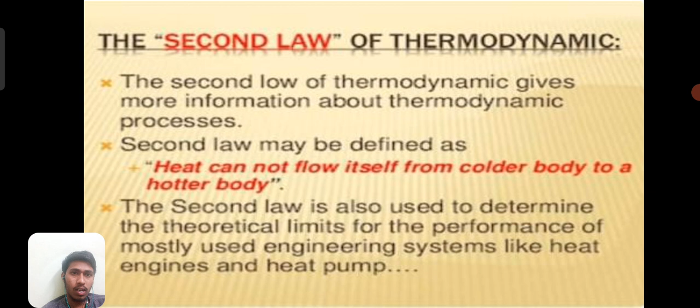and Carnot's principle, which is related to engineering thermodynamics, specifically the second law of thermodynamics. The second law gives more information about thermodynamic processes. It may be defined as: heat cannot flow by itself from a colder body to a hotter body. The second law is also used to determine theoretical limits for the performance of commonly used engineering systems like heat engines and heat pumps.

The Kelvin-Planck statement of the second law of thermodynamics states that it is impossible for any device, such as a heat engine operating on a cycle, to receive heat from a single reservoir and produce a net amount of work.

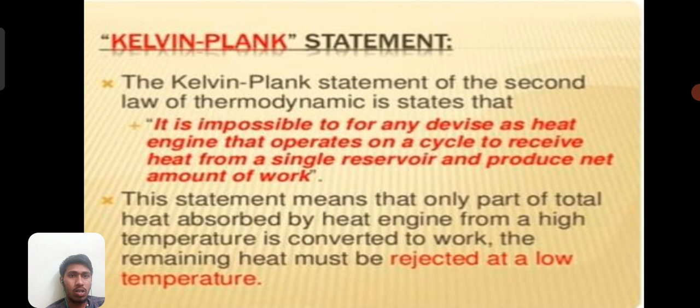This means that only part of the total heat absorbed by the heat engine from the high temperature source is converted into work; the remaining heat must be rejected to a low temperature. The Kelvin-Planck statement implies that high temperature heat is partly converted into work, and the remainder is rejected to a low temperature sink.

The heat engine shown in figure 1 converts 100% of heat into 100% of work, where the initial and final results are the same. This system does not satisfy the second law, so the statement can also be expressed as: no heat engine has 100% thermal efficiency.

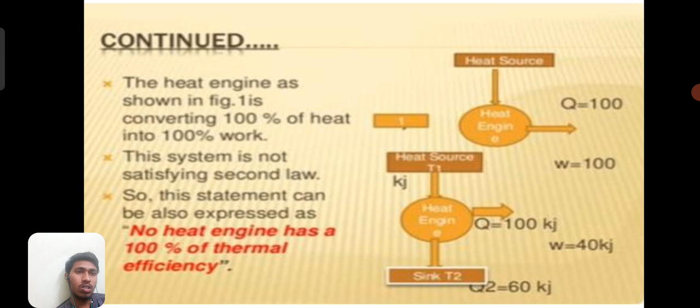As shown in the following diagram: heat engine Q equals 100, with a heat source and a sink, where the heat source is known as T1 and the sink as T2. Q equals 100 kilojoules, work equals 40 kilojoules, and the rejected heat is 60 kilojoules.

This is known as the Clausius statement of the second law of thermodynamics: it is impossible to construct a device, such as a heat pump, that operates in a cycle and produces no effect other than the transfer of heat from a lower temperature to a higher temperature body.

This statement means that heat cannot flow from colder bodies to hotter bodies without work input. The Clausius statement says it is impossible to construct a device, such as a heat pump, operating in a cycle that produces no effect other than the transfer of heat from low temperature to high temperature, meaning heat cannot flow from colder to hotter bodies without any work.

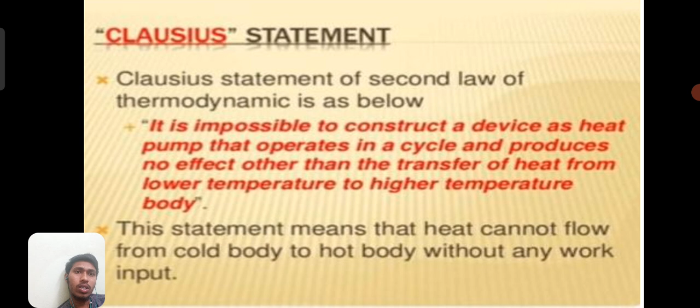We can observe a flowchart diagram where the heat source is T1 and the heat sink is T2, representing a heat pump. Here Q1 equals 100 kilojoules, no external work is supplied, and Q2 equals 100 kilojoules.

In the second diagram, we observe that work is done from T2 to T1, where T2 is the sink and T1 is the heat source. Q1 equals 100 kilojoules, Q2 equals 60 kilojoules, and external work is supplied, giving a final work result of 40 kilojoules.

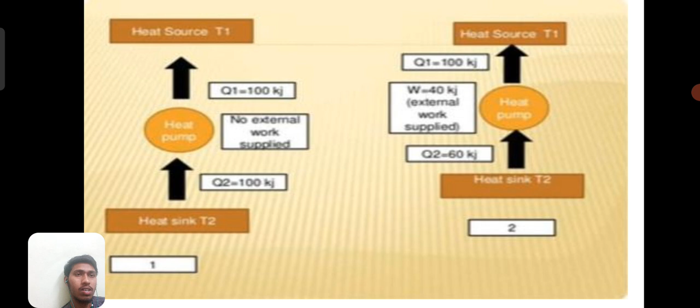Comparing the Clausius statement and the Kelvin-Planck statement: the Kelvin-Planck statement is applicable to heat engines, while the Clausius statement is applicable to heat pumps and refrigerators.

Both are negative statements, based on experimental observations with no mathematical proof.

These are the comparisons made between the Kelvin-Planck statement and the Clausius statement.

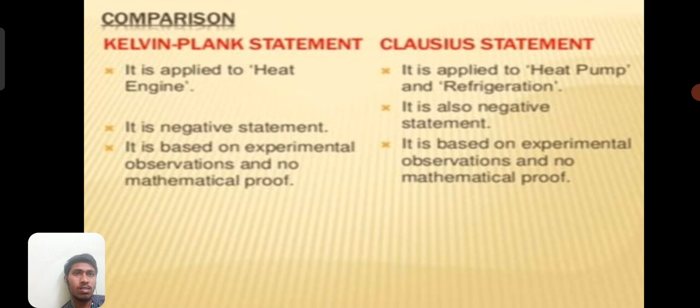Our topic is perpetual motion of a machine second kind, known as PMM2. If the engine exchanges heat with a single thermal reservoir in which heat supplied is completely converted into an equivalent amount of work, its efficiency becomes 100%. This kind of machine is known as PMM2, generally called perpetual motion of a machine.

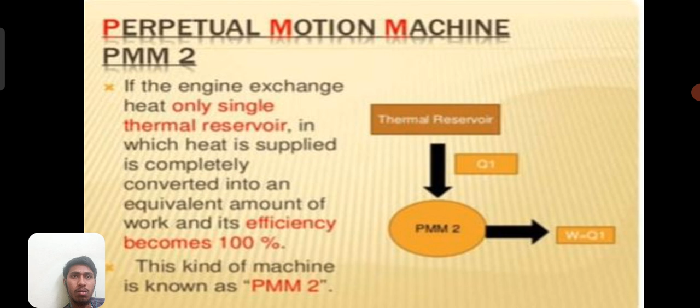If the heat engine exchanges heat with only a single thermal reservoir in which heat supplied is completely converted into an equivalent amount of work, heat is completely converted into work and efficiency becomes 100%. This kind of machine is known as PMM2, and PMM2 violates the second law of thermodynamics and is practically impossible to construct. The efficiency of PMM2 is work equals heat, and efficiency is 100%.

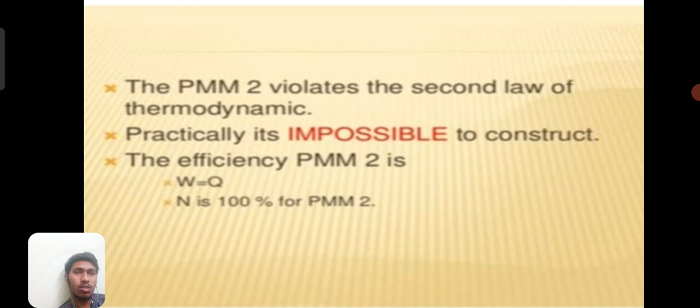Reversible process and irreversible process: a reversible process is one that can be executed in reverse direction with no net change in the system or surroundings. At the end of the forward and backward reversible process, both system and surroundings return to their initial and prior states. No real processes are reversible; however, reversible processes are theoretically the most efficient. All real processes are irreversible due to irreversibility. Hence, real processes are less efficient than reversible processes.

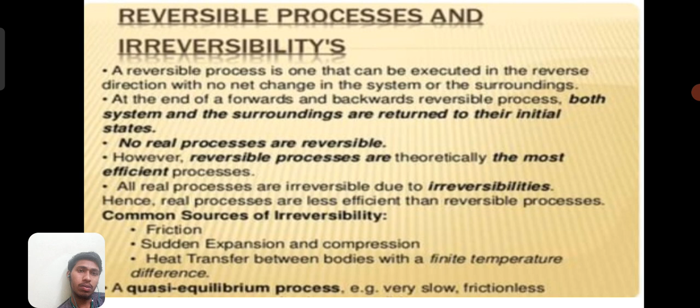Common sources of irreversibility are friction, sudden expansion and compression, and heat transfer between bodies with a finite temperature difference. A quasi-equilibrium process is very slow and frictionless. Now let's discuss the Carnot cycle and Carnot heat engine.

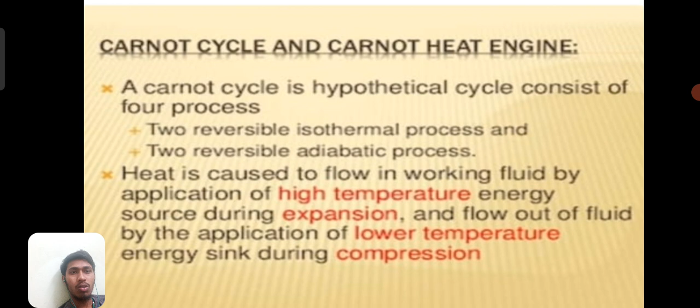Heat is caused to flow into the working fluid by application of a high temperature energy source during expansion, and flows out of the fluid by application of a low temperature energy sink during compression.

The walls of the cylinder and the piston are considered perfect insulators of heat. Heat transfer does not affect the temperature of the source or sink. Compression and expansion are reversible, and the working fluid is a perfect gas with specific heat.

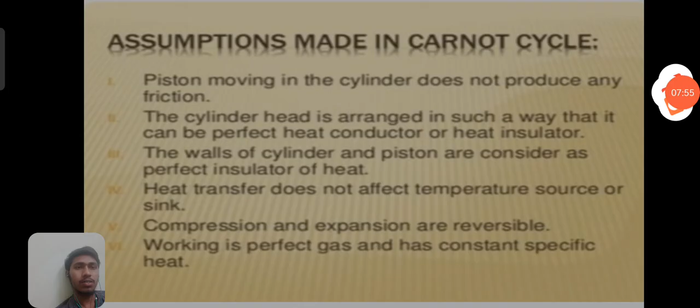Idealized thermodynamic cycles consist of four reversible processes, and the working fluid can be any substance. The four reversible steps of a Carnot heat engine are: reversible isothermal expansion, reversible adiabatic expansion, isothermal compression, and adiabatic compression.

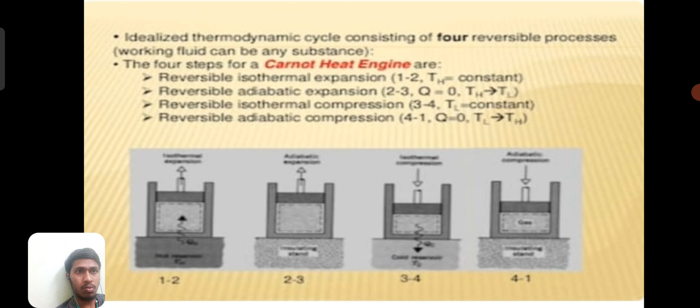By observing the following figure, we can see that 1 to 2 is isothermal expansion, 2 to 3 is adiabatic expansion, 3 to 4 is reversible isothermal compression, and 4 to 1 is also reversible adiabatic compression.

In the Carnot cycle, work done by a gas equals the integration of P dV, which is the area under the curve of the process between points 1, 2 and 3, as we can observe in the figure.

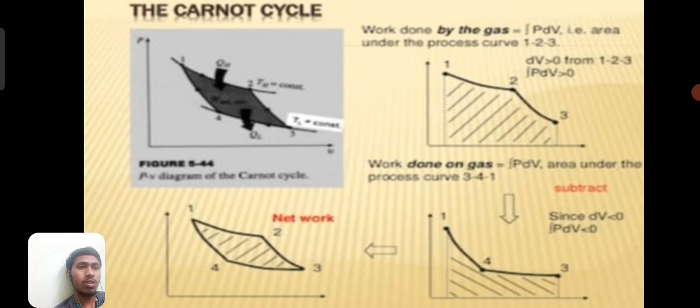Work done on a gas equals the integration of P dV, or the area under the pressure curve for 3, 4, 1, and the net work is shown by the graph for 1, 2, 3, 4. Since the volume change is less than 0, the integration of P dV is less than 0, and thus the work is also less than 0. Thank you for giving this opportunity.